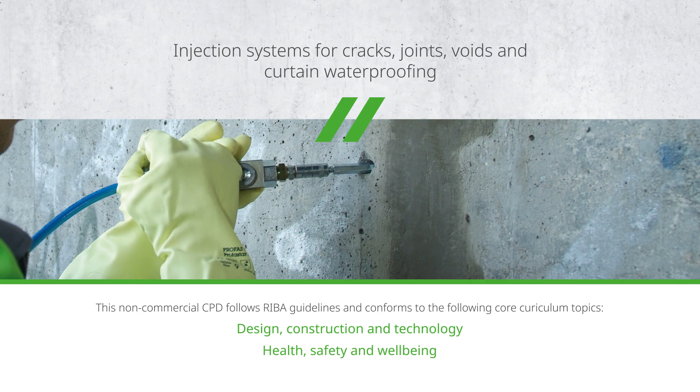Welcome to the Köster Aquatecnic CPD on injectable systems for cracks, joints, voids and curtain waterproofing.

The contents of this training are split into 7 sections: a short introduction to Köster Aquatecnic and myself; what we can do with injection resins; key types of products available, covering polyurethane resins, epoxies, acrylic gels and microgrouts; ancillary products such as injection packers, injection pumps, cleaners and special mortars; health and safety; detailed application guidance; and the main injection techniques, including some interesting case studies.

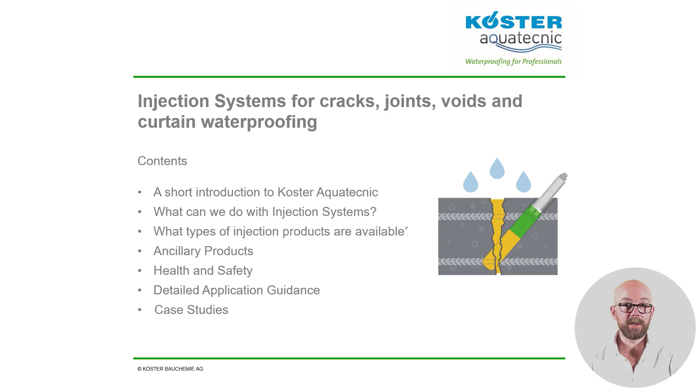Learning objectives: by the end of this CPD, you'll have increased your knowledge on the different uses of injectable products, be able to understand the strengths and weaknesses of the various systems and in what situations they are relevant, and you will have a solid introduction into the injection techniques used and the types of equipment needed.

But firstly, I would like to introduce myself and Köster Aquatecnic. My name is Alex Lynn. I'm the Technical Director for Köster Aquatecnic. I've been with the company for several years and I'm a CSSW qualified surveyor and designer.

Köster Bauchemie is located in Aurich in the northwest of Germany and was founded by Johann Köster in 1982 as a manufacturer of waterproofing systems. Today, Köster Bauchemie is a group of 26 companies with worldwide activities. Köster specialises in the development and production of waterproofing systems and construction chemicals.

Our UK operation was established in 1999 to provide distribution and local technical support for the Köster range. We provide a free, in-depth technical consultancy service, helping you to find the best solution for each individual project. For remedial works, we can help to ensure that a correct diagnosis is made, which is the first step to finding a cost-effective and permanent solution. For new builds, we can provide individual detailed drawings prepared by our CSSW qualified staff to suit even the most complex of structures.

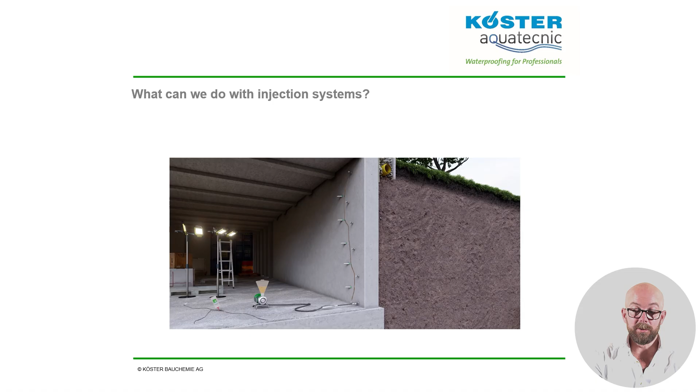First up, injection of leaking cracks or construction joints. This sort of work would normally be carried out with foaming polyurethane resins. Cracks can occur due to shrinkage, movement, or stress. With injection resins, we can stop the leaks and elastically seal the crack pathway.

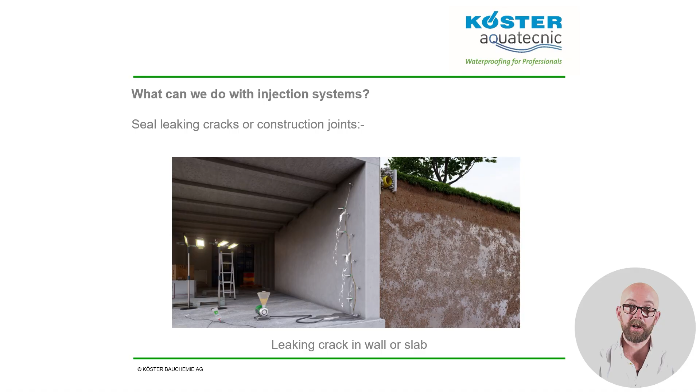Another area that often causes problems is the wall-to-floor junction. It may be that the concrete wasn't properly vibrated, or there was a problem with the water bar, or perhaps the shutter wasn't tight, letting some of the cement paste leak out and creating voids. With injection resins, we can seal this joint either with a borehole injection or by pumping resin into a pre-installed injectable water bar.

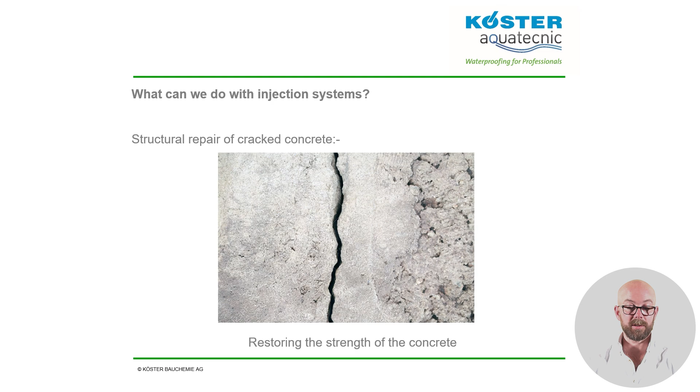Resin injection isn't just about stopping leaks. In some cases, resin injection is used to restore the structural strength of the concrete. For instance, when you have cracks in a load-bearing concrete beam or cable anchor blocks, with the latest generation of epoxy resins, even the smallest cracks can be injected, restoring the original strength of the concrete.

At this point, it is interesting to ask the question: what is a crack? Would anyone like to answer this question? We'll have a think about it. There are many correct answers, but an answer will be provided later on in this presentation.

When movement joints leak, they can be very difficult to repair. However, with a polymer-modified acrylic gel, these joints can be sealed elastically, even when wet.

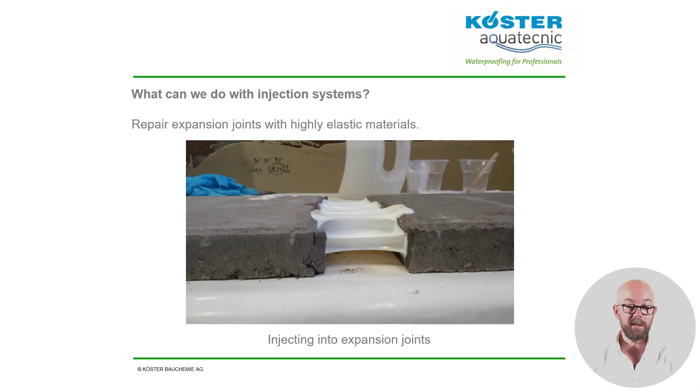It is always preferential to waterproof below-ground structures from the outside, the positive side. However, with existing buildings, it is often impossible to excavate the basement. You could waterproof internally with a cementitious coating or a cavity drainage system, but if it's historic brickwork or stonework, the only option is to waterproof externally, but from the inside. This is called curtain injection and is normally undertaken using acrylic gels.

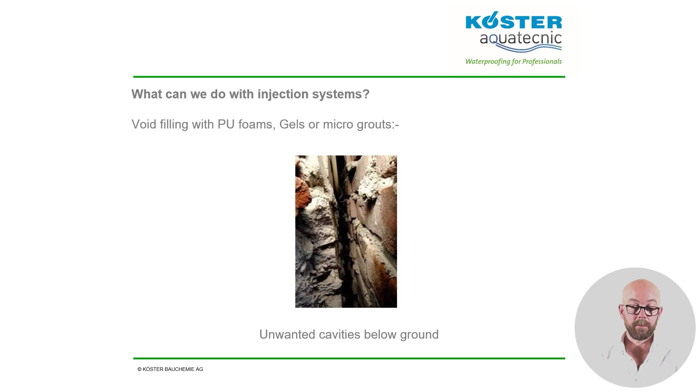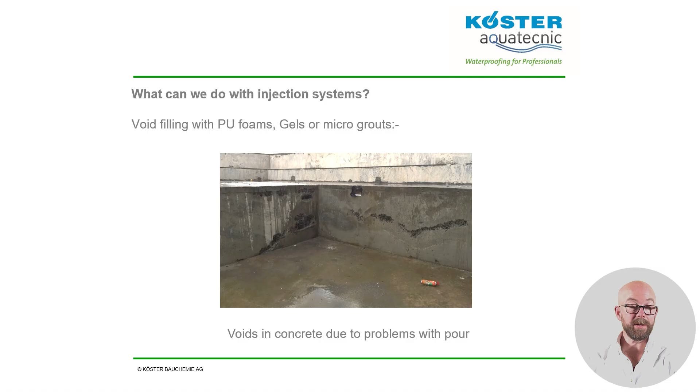Void filling. This is a good solution where a non-maintainable cavity has mistakenly been created below ground. Other voids encountered are those formed during the concrete pour due to lack of vibration, bad rebar placement, or leaking shuttering. For these voids within the structural concrete, a microgrout would normally be used.

So, having looked at what we can do with injection, we can now look at the types of injectable products available. The first category is polyurethane resin.

There are three main types of injectable PU resins: 2-in-1 resins, which foam on contact with water, or without water form an elastic solid body resin; 2-component highly elastic solid body resins; and 1-component fast foaming water stopping resins, either with or without an accelerator. We will look at each of these in a little more detail in the coming slides.

There is another category which we won't be covering, and that is slab jacking resins. This is where they inject a very fast reacting foam with strong expansion beneath a concrete slab to lift or realign it. This is a highly specialist and potentially hazardous activity, which we are not involved in.

All modern PU resins are based on MDI isocyanates and are free from the more harmful TDI isocyanates, which unfortunately can still be found in the UK market. You can normally spot these as they have a skull and crossbones on the label.

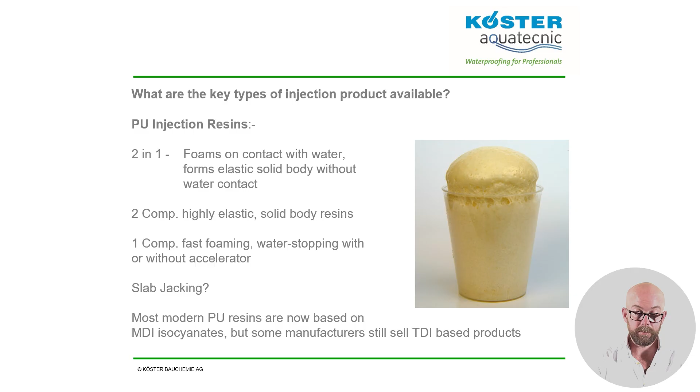2-in-1 resins are very versatile. They are a 2-component polyurethane, but work in a very interesting way. As soon as you mix part A and B together, the reaction has already started. If you just left that mixture on its own, it would cure to form an elastic solid body resin, as shown on the right.

This would be ideal for injecting into dry cracks to achieve a permanently elastic seal. However, if you introduce the freshly mixed material to water or dampness, it will react to make a foaming polyurethane. This one material can be injected into dry, damp, or wet cracks. When you inject into a wet crack, the material reacts to form an expanding foam. This uses up some of the water in the crack and pushes the rest of the water out.

The foam is fully formed in about 6 to 10 minutes. It is then re-injected with the same material after 15 to 20 minutes. The new injection will push back the soft foam and fill the crack with a solid body of resin. There is no water contact during the second process, therefore the product does not foam. The elastic solid body resin has much greater elasticity than the foam and will create a permanent seal.

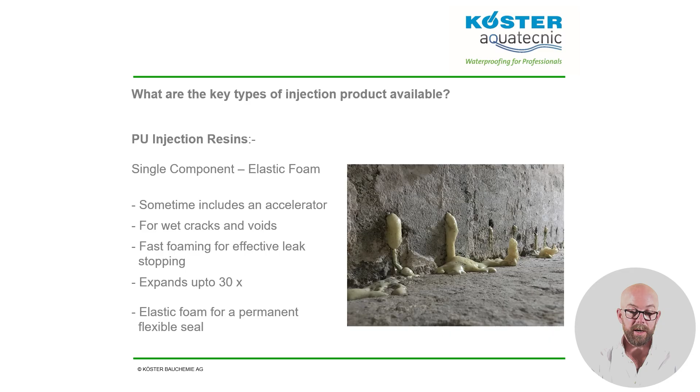It is very important when selecting a single component resin that you choose one that produces an elastic foam. There are some rigid single component foams in the market. These can stop water leaks, but will shrink back over time or crack if there is any movement. An elastic foam will grip firmly to the internal surfaces of the crack and will allow for continued movement.

Next, we're going to focus on acrylic gels. But firstly, what is a gel? Acrylic gels are different technology to the polyurethanes. They are made of methacrylates. They behave in a different way to polyurethanes and present several advantages.

Acrylics do not react with water, but form chains of polymers that are connected so strongly that they bind water inside their structure. Since acrylic gels contain water, they are in a state between solid and liquid, giving it a viscoelastic consistency. They are highly elastic, but if physically split, they tear in a similar way to edible jelly. The connections between the polymers are so strong that they can resist a water pressure of over 7 bar.

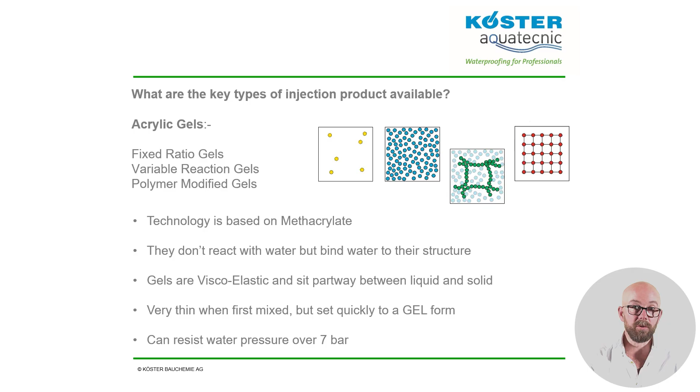Most acrylic gels fit into one of 3 categories: fixed ratio gels, variable reaction gels, and polymer modified gels. We will start with the fixed ratio gels, as these are the default product for curtain injection. They are supplied in 3 parts: A1, A2, and a B, which is a salt.

You pour the A2 into the A1 drum and mix by simply rocking from side to side. The part B is emptied into the second drum, which is then filled with clean water to the same volume as the first drum. The pre-mixed A and B components are then pumped separately through an acrylic gel pump.

At a ratio of 1:1, the materials only come together at the mix head just before entering the injection packer. There is a third hose in the pump, which is for water and is used for flushing and cleaning the mix head. The gel can also be stirred by hand and poured, but you should only mix what can be used within a few minutes.

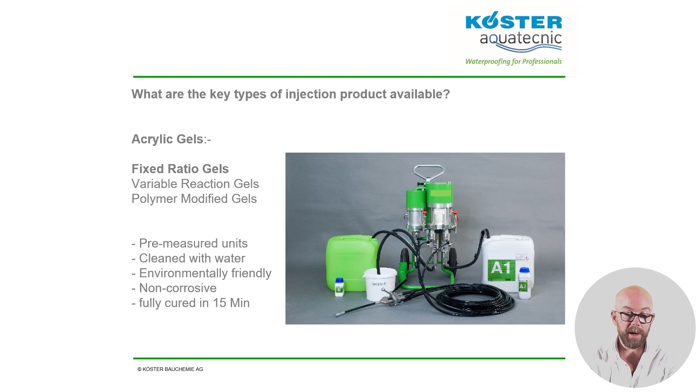This type of gel is environmentally friendly and will not pollute the watercourse. With the latest gels of this type, all the salt is used up in the reaction so they don't cause corrosion to any metals within the structure.

When first mixed, the material has an extremely low viscosity of 4 millipascals. As a comparison, water would be 1, sunflower oil is approximately 48, and runny honey would be at least 2000. So the gel seems pretty like water.

After 3 to 4 minutes, the material will enter the cloud phase, where the material starts to show a purple tinge, then slowly turns white. By 6 to 8 minutes, the network phase, the material begins to rapidly start to thicken. After about 15 minutes, the reaction is complete.

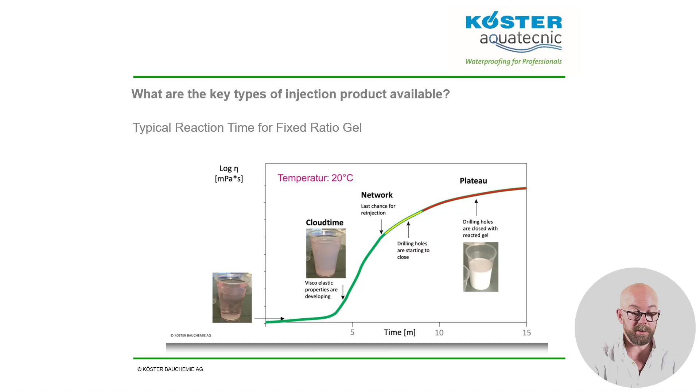The great thing about fixed ratio gels is that there's no weighing or measuring to do on site. Everything is set to the perfect ratio for most applications.

Here we can see a demonstration of an acrylic gel in action. In the small container we have sand. In the right-hand beaker we have the part A, which consists of the part A1 and A2. And in the other beaker we have the part B, which consists of the B1, which is a special salt, mixed with water. You can see that the two parts take up the same volume.

After mixing the part A and B together, some of the mixture is poured into the sand and some is left in the beaker. Note that the material isn't stirred into the sand but penetrates easily, just as water would.

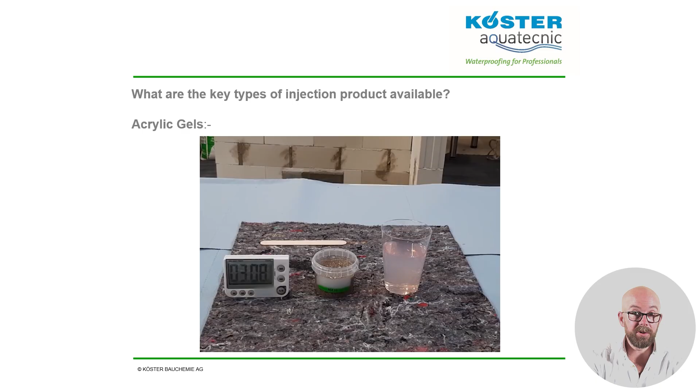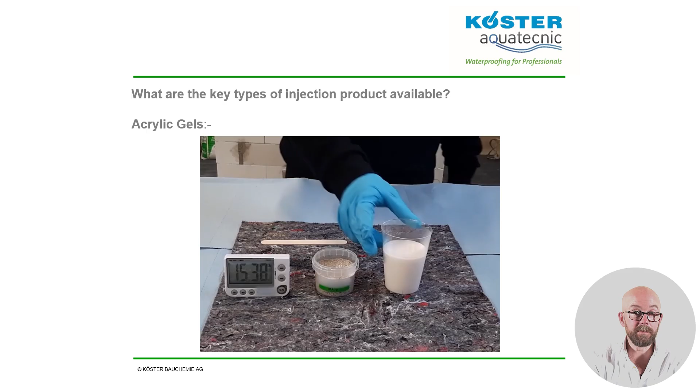After about 3 minutes, the material starts to go cloudy, and in about 6 to 7 minutes, it forms a gel, which gets gradually harder over the next few minutes until the reaction is complete in about 15 minutes. At this time, the gel is very solid and has a firm, rubbery texture.

The sand has completely consolidated by the gel and is now a firm, waterproof mass.

The variable reaction gel has most of the same properties as the fixed ratio gel, but has a higher degree of versatility. Whereas the initial gel time for the fixed ratio gels is about 8 minutes, the variable reaction version can be customized to gel when you need it to.

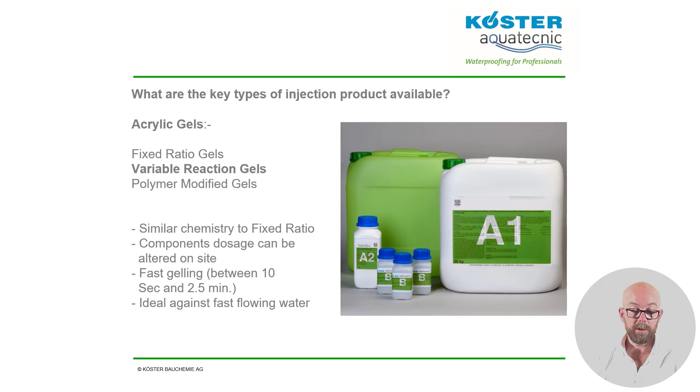The gel time can be set to anywhere between about 10 seconds and 2.5 minutes. The time is altered by changing the dosing of the B component between 50 grams and 1 kilogram. The material is mainly used for situations where you have very heavy flows of water.

A polymer modified gel is the same as a variable reaction gel, but uses a special polymer combined with salt for part B, instead of water and salt.

This has 3 beneficial effects: it makes the reaction time faster, it improves the flank adhesion in joints, and it increases the resistance of the gel to drying out when there is no contact with ground moisture.

This gel is mainly used for refurbishment of failed expansion joints. It can be used with minimal surface preparation on wet joints and has incredible elasticity and adhesion.

Now we come to epoxies for structural repair. It is always important to choose one with low viscosity, particularly when injecting fine cracks and networking of cracks.

These products are used for structural repair by either pressure injection, pouring, or vacuum injection. The best products have a very low viscosity of 175 millipascals. This is less than half the viscosity of some of the older style epoxies used for injection and will be described as a thin liquid.

The low viscosity means it can be used in even the smallest of cracks at very low injection pressure and can even be gravity fed into repaired floor cracks. This type of low viscosity epoxy also has very good adhesion even to damp concrete and cures to a strength of 80 newtons per millimetre squared, so can fully restore the structural integrity of the concrete.

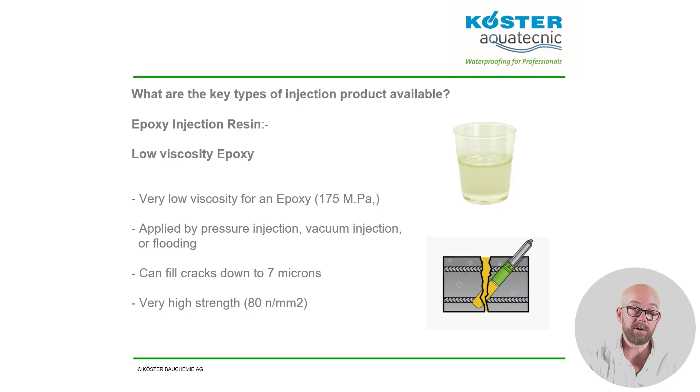Now for something completely different. Microgrouts aren't injection resins, but cementitious injection materials. They are used for filling large voids in concrete and for restoring the structural strength. They are thicker than epoxy resins, but still very thin for a mortar, with very good flowability.

The maximum particle size is 0.1 millimeters. In theory, you could fill cracks down to 0.2 millimeters. However, when dealing with any cracks under 2 millimeters, we would always recommend an epoxy resin. You can do crack injection with a microgrout, but there are better products available.

Where microgrouts really come into their own is for filling large voids within concrete. With microgrouts, we can fill voids with a product of a similar strength and characteristics of the concrete surrounding it. The material is supplied in powder form and is simply mixed with water. It's pumped using a peristaltic pump or any other grouting pump. The final compressive strength after 28 days is 60 newtons per millimetre squared.

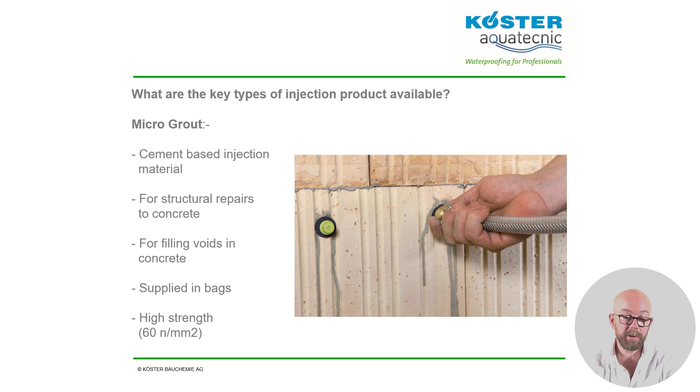That's all the injectable products. But what ancillary products do we need to facilitate the injection? Firstly, injection packers or lances. These are the mouthpieces through which the injection product is delivered into the crack or void.

They come in all different shapes and sizes. Impact packers are generally made of plastic with fins or lamellas along their sides. The packer is force-fitted into the borehole with a hammer or drive-in tool. As it goes in, the lamellas are forced out of shape and make a positive seal against the walls of the borehole, locking the packer into position.

Some drive-in packers have a non-return valve, some have no valve at all, and some have an optional valve piece that can be pushed on if required. Impact packers are normally left in the wall. After injection, you can cut off the protruding piece and drive the rest deeper into the wall. Some are designed to snap off at a particular point within the hole if hit with a hammer, making the removal process very quick and easy.

The most common type of injection packer is the expanding packer. These are made from metal, they have a screw thread, and when you tighten the shaft, the rubber piece in the hole becomes compressed lengthways, forcing it to expand outwards, firmly gripping the walls of the borehole. These packers either have a grease nipple or conehead fitting to connect to the injection hose and pump. These connection pieces contain a ball valve, which ensures the injected material won't leak back out when you stop injecting.

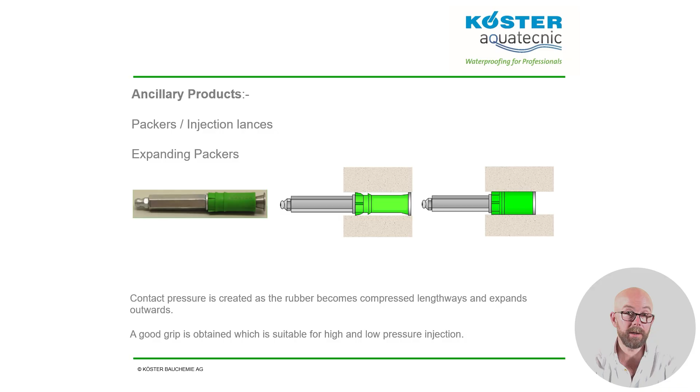The one-day packer is designed for small injection jobs, where the contractor wants to get in and out in one day. It is similar in principle to the standard packers, but has an additional non-return valve at the end that goes into the wall, as well as a locking ring halfway up the shaft.

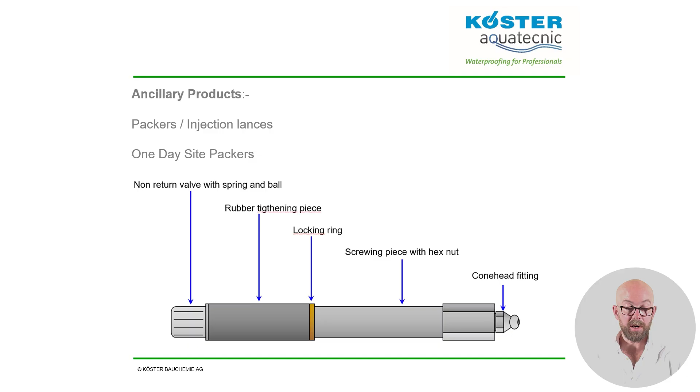When you are finished injecting, you can unscrew the shaft, leaving the rubber part tightly in the borehole. The injection resin can't flow back out due to the extra valve, so you can fill the mouth of the borehole straight away. With a normal packer, you would have to wait for the injection material to cure before unscrewing it.

There are special gel packers specifically designed for curtain injection. The packer comes in 3 pieces: a connection piece, a shaft which is cut to suit the wall thickness, and a special mouthpiece to push the material out sideways.

During the injection process, we often use fast-setting mortars and water stops. The most common use is for sealing the front of the crack prior to injecting. In the case of a dry or damp crack, this can be done with a fast-setting, high-strength mortar with a set time of about 5 minutes.

Why do we seal the front of the crack if it's dry though? To keep the injection resin in the wall during injection. Because when you start injecting, the resin's under pressure. To equalise that pressure, the resin looks for the fastest and easiest route out. This will often be straight out the front of the crack and down the surface of the wall. But we want the resin to move slowly along the crack pathway and seal the whole depth of that crack. Therefore, we use the mortar to seal off this escape route.

The same mortar is then also used after removal of the injection packers to seal up those boreholes.

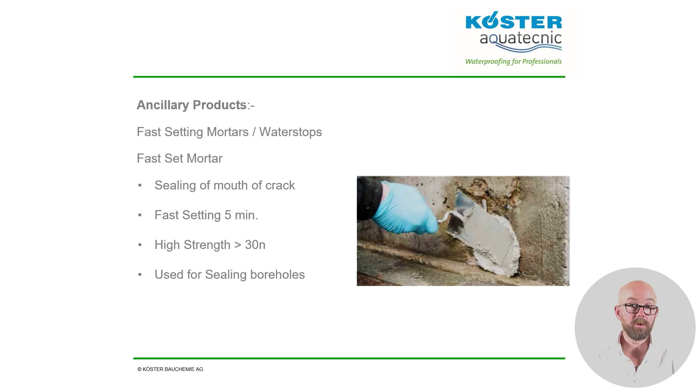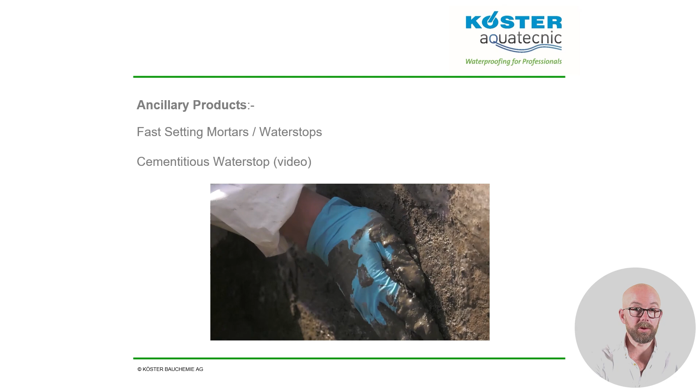In the case of flowing water, we may need to use a cementitious water stop to temporarily stop the leakage, slow the leakage, or push the leakage to a particular point. Water stops set in about 2 minutes and slightly expand, creating a very tight seal.

Different injection products require different types of injection pump. These vary from a simple hand pump, basically a grease gun, to a pneumatic gel pump with 3 pistons. The choice comes down to what you are injecting and how large the project is.

The last of our ancillary products is cleaner. Proper cleaning is of the utmost importance. If the injection material is allowed to set in the pump, you will incur expensive repair charges. PU resins are always cleaned with a PUR cleaner. This is solvent-free but very good at shifting fresh resin.

For the gel pump, it's a little easier as the A and B components are not mixed together until they reach the mix head. The material is a lot thinner and less sticky than polyurethane resins, so for gel pumps we can just clean with water. For microgrouts, you can again use water to flush out the pumps. You should also use foam cleaning balls to help clean any mortar residue from the delivery hose.

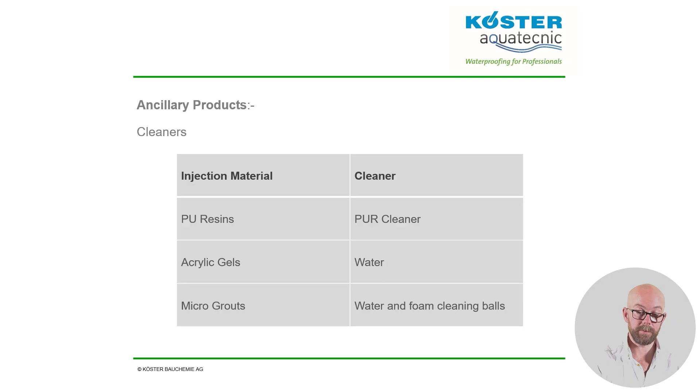The health and safety and well-being of the people who work with waterproofing materials must be considered, and stringent policies put into place. All UK construction sites require operatives to wear basic PPE, but when working with specialist materials, there may be additional requirements such as ear defenders, dust masks or face shields, gloves, overalls, and forced ventilation.

None of the Köster injection materials contain solvents, but eye protection and gloves should always be worn. Cured material, particularly epoxy or PU resins, is very difficult to remove from your skin. For some injection materials, forced ventilation or even breathing apparatus could be required if in confined areas.

We also have to be careful working with drills, particularly in areas where the structure is compromised. The main contractor should prepare a COSHH risk assessment for every site where crack injection works are being carried out. The material and application risks are made clear on the manufacturer's MSDS sheets.

We will now look a little more into the specification and application of injection products. Before specifying a particular system, we try to understand the cause. By understanding the cause of a crack, we better know how to fix it.

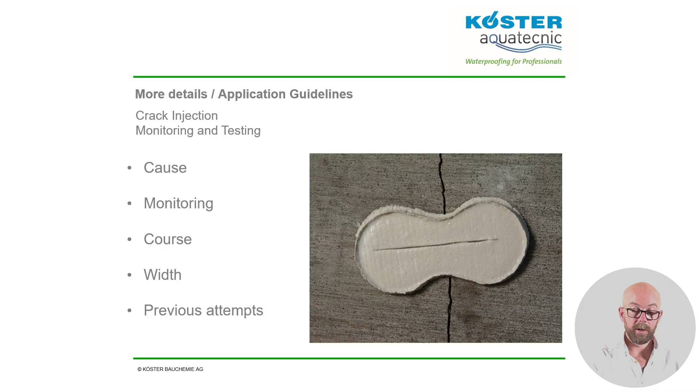Monitoring. If the crack is still moving, how do we know? In some cases, it is agreed to monitor a crack over a period of time. A monitoring gauge is used. The simplest form is a gypsum mark, as shown in the picture. This will show movement by cracking across the narrow centre section.

A more complex type of gauge is made up of two parts which are firmly bonded on each side of the crack. A scale will show whether the crack is moving, and readings can be taken at regular intervals.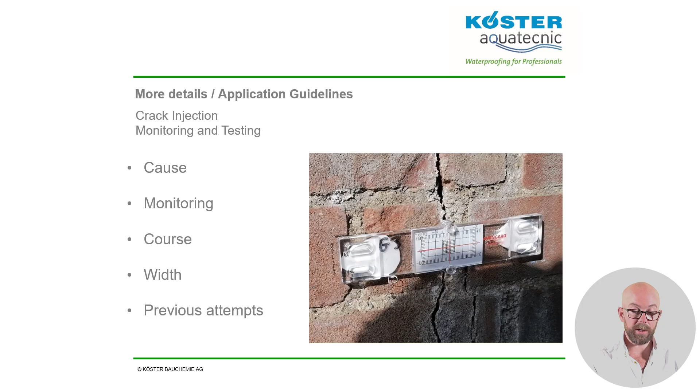The course: if we can learn the course of the crack, we often see that it interacts with other elements such as day joints or expansion joints. This may be the way in which water is being fed into that defect. Understanding the interaction of the crack within the structure can help us select the best location for the injection packers.

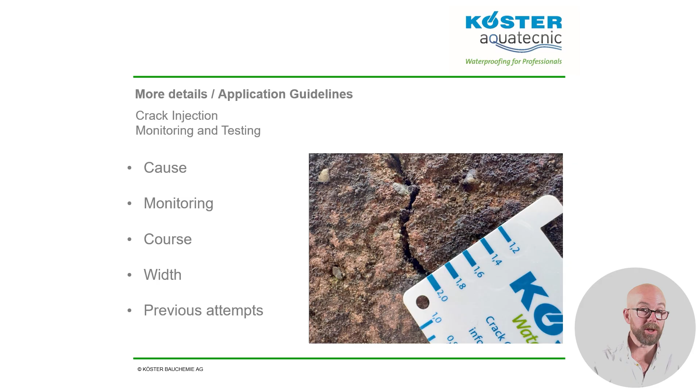The width of the crack. This will affect the amount of injection material used, the type of injection material, and the spacing between packers.

Previous attempts. If someone has made previous attempts to seal a leaking crack, the connectivity between the boreholes can be affected. The crack is partially filled with old resin, which may have shrunk back slightly. It is therefore very difficult to find a way of hitting all the weak spots. It may be that you need to drill additional boreholes and allow for repeat visits to ensure sealing of all the leaking areas.

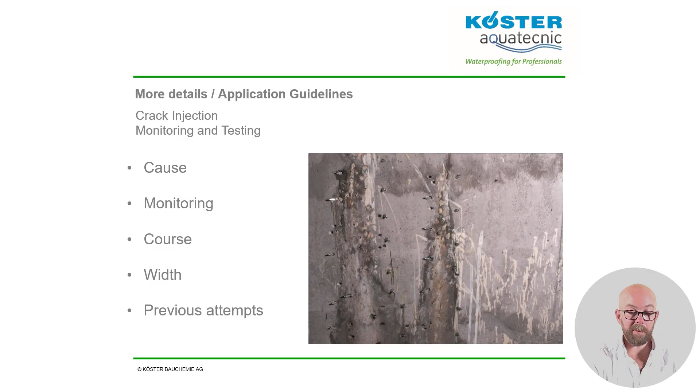This is a crack survey that was carried out on a wind turbine base. Producing such a survey takes a lot of time and effort, but is very useful when planning the job, during the application, or even in the future, so we can tell if any new cracks have developed.

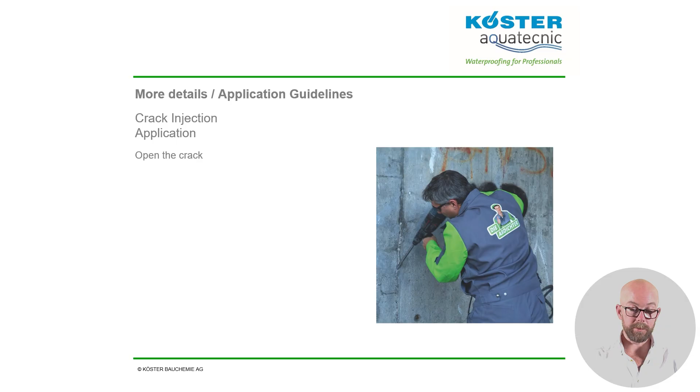Now, we will look at a typical resin injection project using a polyurethane 2-in-1 resin into a vertical crack. Firstly, we should open up the face of the crack with a grinding disc or a breaker, removing all loose material. The borehole positions are marked on either side of the crack.

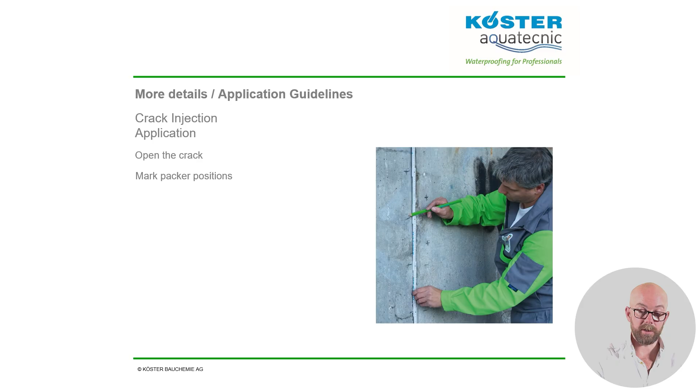The narrower the crack, the closer together the packers need to be. Typically, this would be between 100 and 150 millimeters on alternate sides of the crack. Drill the boreholes, in this case 14 millimeter diameter, intersecting the crack about halfway through the wall thickness.

Seal the face of the crack with a fast-setting mortar, or in the case of heavier water flows, a cementitious water stop. This helps to keep the resin within the crack matrix during the injection process.

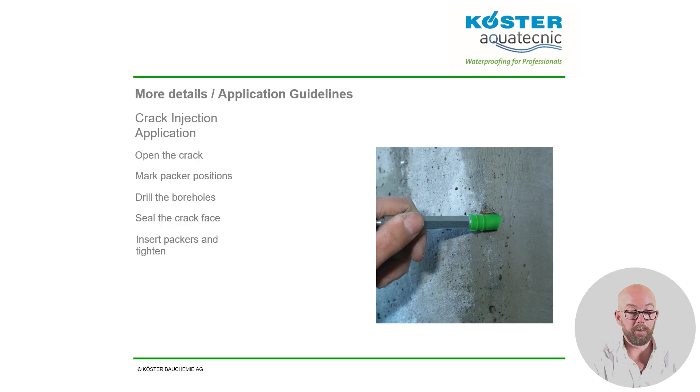Next, insert the packers into the borehole and tighten. Each packer is injected in turn, working from the bottom upwards. If you're injecting with a 2-in-1 resin, then each packer is re-injected after 15 minutes.

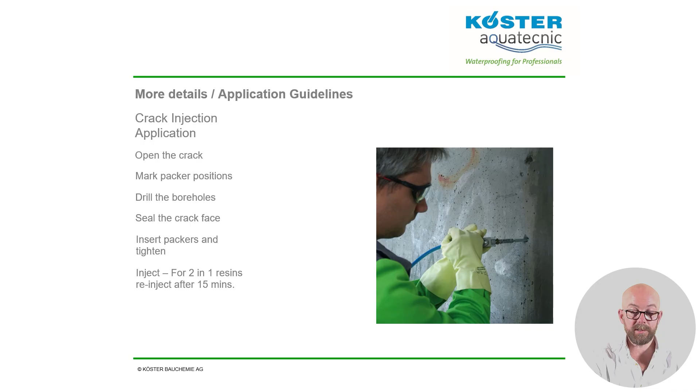During the second injection, there is no water contact and the two-component polyurethane will cure to form an elastic solid body resin. It is normal to loosen or remove the next packer in the chain during injection.

When you see the resin arriving at the open borehole, you will know that the section of the crack is fully filled. The packer is then replaced or retightened, and you continue injecting, moving along the crack until completely filled.

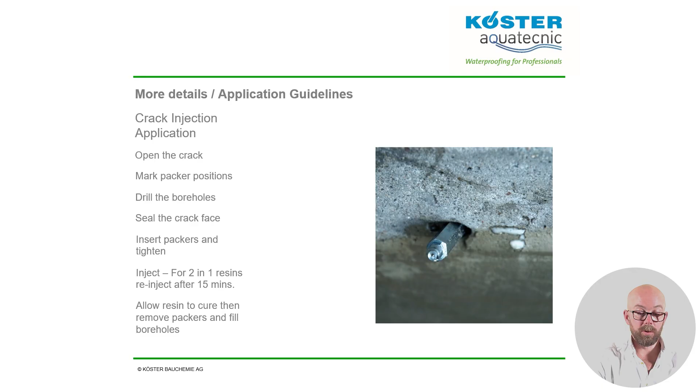After the second injection, allow the resin to fully cure. With most resins, this will take 24 hours. The packers can then be removed by unscrewing and the boreholes filled with the fast-setting water stop. If using one-day site packers, these can be removed immediately after the second injection.

The boreholes continue a little beyond the crack. This helps to prevent drilling debris from clogging the pathway of the injection resin. The packers alternate from one side of the crack to the other.

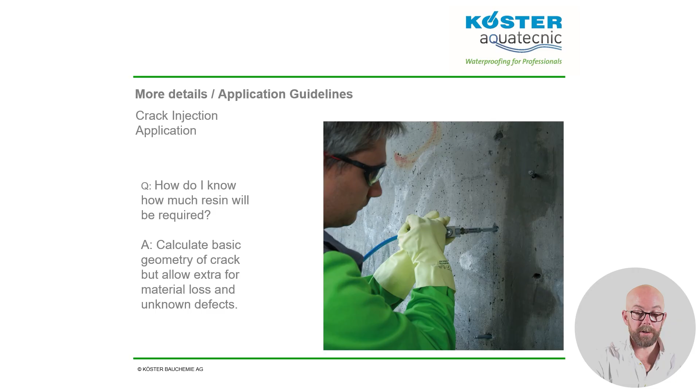How do we know how much resin to inject? We can estimate consumption by looking at the theoretical volume of the main crack itself. It's unknown how much material will be lost at the back of the wall or into defects branching off it, though. This is where the experience of the supplier or specialist contractor is so important.

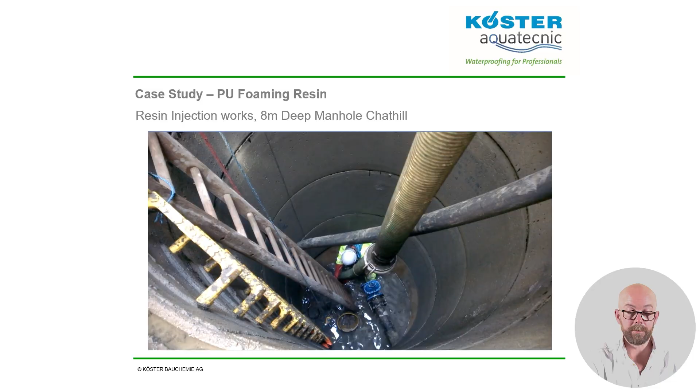We will now look at a case study involving injection of a single component elastic foaming polyurethane. This is an 8 metre deep manhole on a new sewerage treatment works in Northumberland. Several attempts have been made by others at sealing the deep manhole, but they had all failed. The water ingress was quite extreme.

Following a site visit and detailed investigation, a proposal was made and the client agreed to give this a go. If it failed, they were going to have to excavate the entire manhole and start again.

In all complex injection jobs, the first thing to do is understand the structure. The original build of the manhole was fairly conventional. Firstly, a deep hole was excavated with a cast concrete base at the bottom.

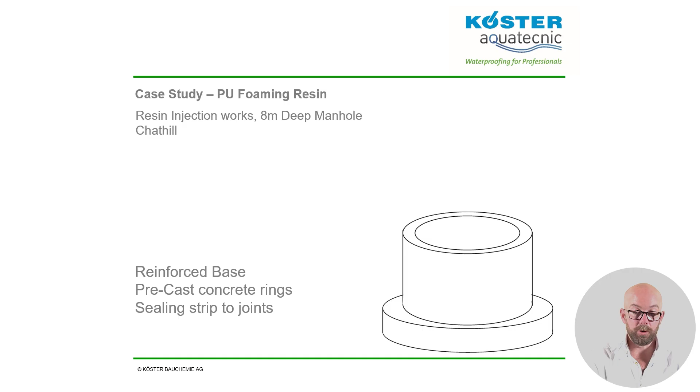Precast manhole rings were installed with a bituminous sealing strip between all the joints. We don't know why this structure originally failed, but it's possible that the sealing strip was missed from the lowest joint or was improperly applied.

To try and stop the water ingress, the contractor had installed a rigid plastic liner. This created an additional reservoir of water between the liner and the manhole ring, and it still leaked.

They then installed an inner wall of concrete rings. This created yet another void for the water to flow into, and guess what happened? Yes, it still leaked. When the water was pumped out, there was a heavy flow of water entering at the wall-to-floor junction, creating a whirlpool effect.

In this situation, the leaks had to be confined to a smaller area. This was done by using a water stop to gradually form a waterproof fillet around that bottom junction. Using this technique, the leakage was confined to 4 equally spaced outlet points.

Boreholes were drilled and injection packers inserted into these points, again sealed around with a cementitious water stop. Hoses were connected to the packers, with the other ends placed into a large bulk bin together with a water pump. Now all the leakage was coming through the 4 hoses into the bin before being pumped away.

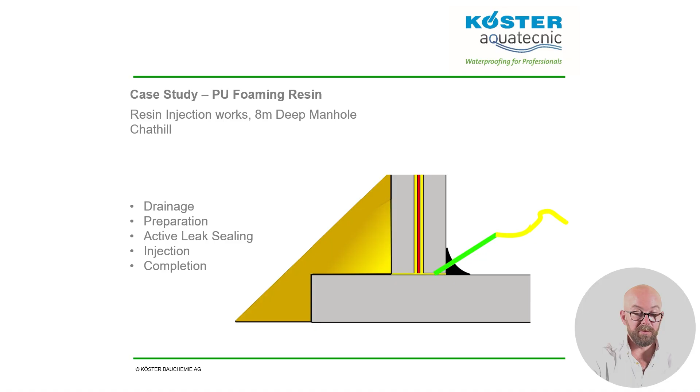After removal of the packers, the boreholes were filled with mortar and everything left for a week to check for further ingress. After a week, there were no leaks, so a new floor at the bottom of the manhole was cast with a high-strength, waterproof and chemically resistant sewer and shaft mortar.

The second Severn crossing is a 5,128 metre long bridge between England and Wales. The centre section is a cable-stayed bridge with 2 approach viaducts. The bridge was completed in 1996 and is now the main entry point into Wales.

During routine maintenance, a large number of small cracks were found in these blocks. After various tests, a full report was submitted to the Second Severn Crossing Authority. It was agreed that structural repair was necessary, and it was further decided that vacuum injection was the best way to proceed.

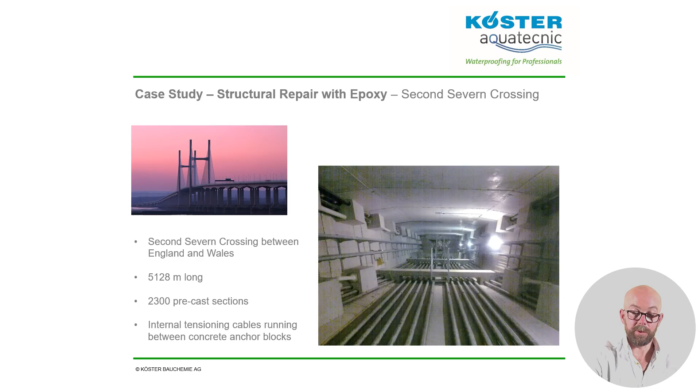Smoke testing had shown that the faults were interconnected, making a complex matrix of cracks in each block. In some areas, the cracks had created islands of concrete that were in danger of falling off if drilling or high-pressure injection was used.

The plates were fixed in place with a two-part adhesive, which was then also used to cover all visible cracks on the surface. The vacuum pump gently removes air and residual moisture from the crack network, creating a low-pressure area which is then ready to receive the injection resin.

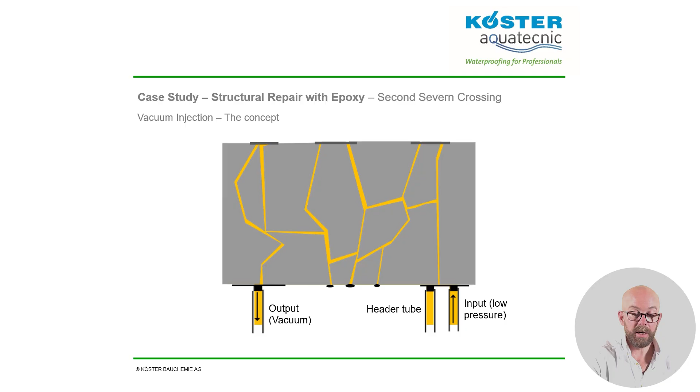At this point, the inlet valve was opened and the resin released. A slight positive pressure was also applied on the injection side as this sped up the process. The resin flowed very easily into even the smallest of cracks and filled the header tube, which was fixed in an upright position.

When the injection was finished, the vacuum side and the injection side were turned off. The full header tube was left open to provide a reservoir, replacing any material lost through slight leakage from the cracks. Once the resin had set, the header tube was then also removed.

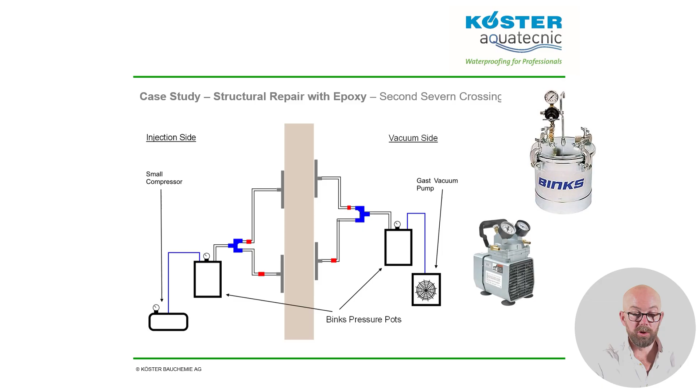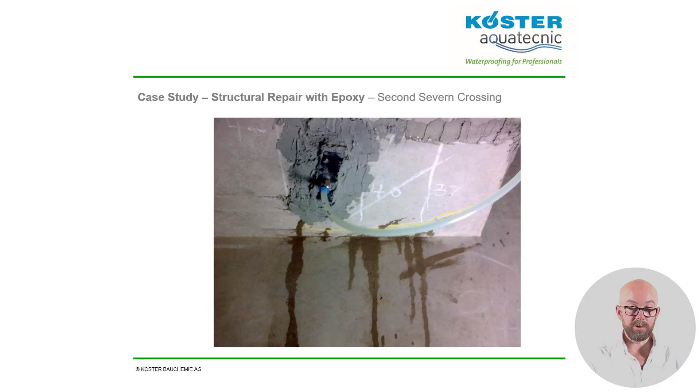Here is an area under injection. You can see some small amounts of resin running down, mainly from the intersection between the anchor block and the concrete wall. We can see that the resin has filled tiny cracks that were not even visible prior to the injection starting. The trial went extremely well, and a core sample was taken from the anchor block to confirm that the cracks were fully filled and that the adhesion to the concrete was good.

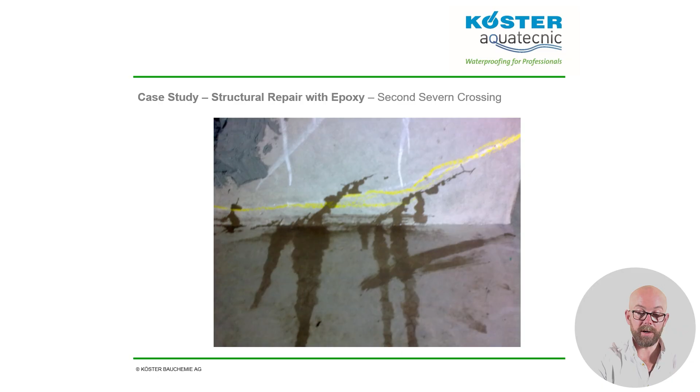Analysis of the core samples under electron microscope revealed that all cracks that could be found in the specimen were fully filled with resin. The smallest crack that they could find was 17 microns - that's 17 thousandths of a millimetre. This could be achieved with a very thin epoxy and by vacuum injection.

The main contractor in the project has now changed, but the work is continuing using the same resin and procedure.

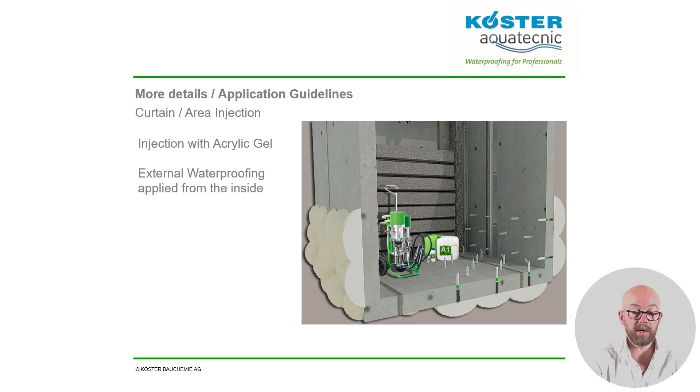We will now have a look in more detail at curtain injection. With curtain injection, we are aiming to install a complete coverage of the injected material across the earth retaining side of the structure. We install packers in a grid pattern across the surface. Curtain injection can be considered as an external waterproofing installed from the inside.

A typical injection pattern is shown on the left-hand side. We call this 400mm centres - basically a 400 by 400mm square with an additional packer placed in the centre. The dimension D is the maximum distance between one packer and its nearest neighbour. Distance D works out at just over 280mm.

The packers are injected in rotation, normally three times for each packer. After the first pass, the easiest pathways are sealed. During the second and third passes, the gel is forced into even the finest capillaries.

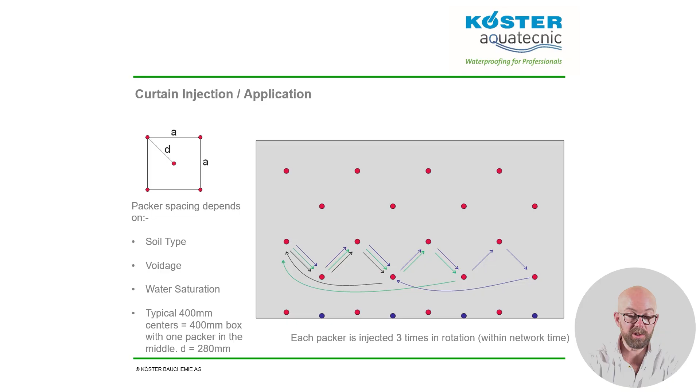The gel time is very important. With a longer gel time, you can get deeper penetration into finer pores. With a shorter gel time, you can seal heavier leakages very quickly.

When you increase the temperature, you decrease the time it takes for the gel to react. Adding more salt has the same effect. The part B of the acrylic gels is a form of salt, so for the variable reaction gels, we can increase or decrease the amount of part B to speed up or slow down the reaction time.

For a classic curtain injection, we completely drill through the wall and then use a gel packer which pushes the gel out sideways into the soil at the back. The gel tends to form a dome shape. As we continue the injection process, the domes of gel overlap to form a continuous curtain of waterproof material at the back of the wall, eventually covering the entire area.

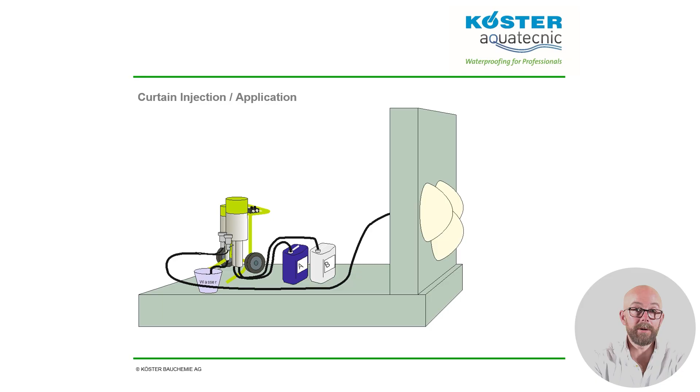An area injection is a slight variation on a curtain injection. We are sealing pathways within the wall rather than creating a barrier behind it. This technique would typically be used in thick masonry walls where there are a lot of voids between the bricks. In this situation, we don't drill all the way through the wall, but stop about 50mm from the back. The boreholes are normally drilled into the mortar joints, and we insert short packers at the wall face.

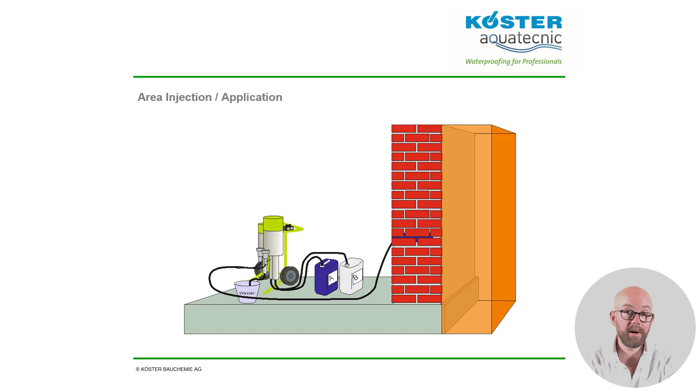By injecting the packers, we fill the boreholes and gel is forced out sideways into the defects. Therefore, the structure is infilled with the waterproof and elastic gel. As the wall is not sealed at the back, a certain amount of gel will inevitably leak out, sealing all the previous points of water ingress.

If doing a full curtain injection on a brick wall, a combined injection is typically carried out. Drill the boreholes all the way through the wall, but insert small packers at the face of the wall. In this way, the gel is deposited at the back of the wall as curtain injection, but at the same time fills any voids within the wall with gel. One advantage is that small boreholes of down to 8mm, depending on the packer, as opposed to 18mm for the normal gel packers, means curtain injection can normally be carried out without damaging brickwork.

In 2016, there was a trial carried out by London Underground to test the effectiveness of a gel injection system for sealing brickwork tunnels. The trial area was located close to Farringdon Station on the Metropolitan line.

The construction of the tunnel included multiple layers of brickwork with an assumed pitch-based waterproofing layer applied externally. Throughout this section of tunnel, there was evidence of water dripping through the brickwork with stalactites and heavy salt and soot contamination.

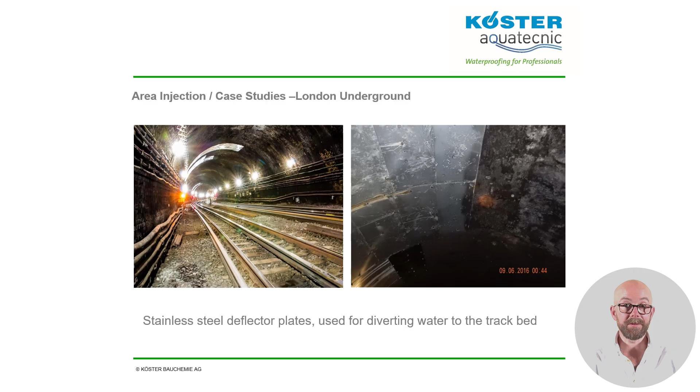In the images in front of you, you can see large steel deflector plates which had been mechanically fixed to the brickwork by London Underground. They are used as a temporary measure to divert water sideways, down the tunnel wall and onto the track bed.

The brief was to provide an elastic, permanent repair with no detrimental effect to the structure or the trains passing through. Acrylic gel was used in combination with a cementitious-based water stop.

A scaffold was erected to ensure a safe working platform. The work was scheduled over 2 consecutive night shifts. Each night, a lot of time was taken up with moving all the equipment from the platform to the trial location, setting up and then taking it back down again.

There was about 2 hours each night to carry out the surface preparation and the injection works. Work started by removing one of the large metal sheets measuring 1 metre by 2 metres from the crest of the tunnel to allow access to the test area.

A closer inspection of the surface revealed a thick crust of salt and soot contamination. This layer was removed mechanically as thoroughly as possible, whilst ensuring the brickwork was not disturbed.

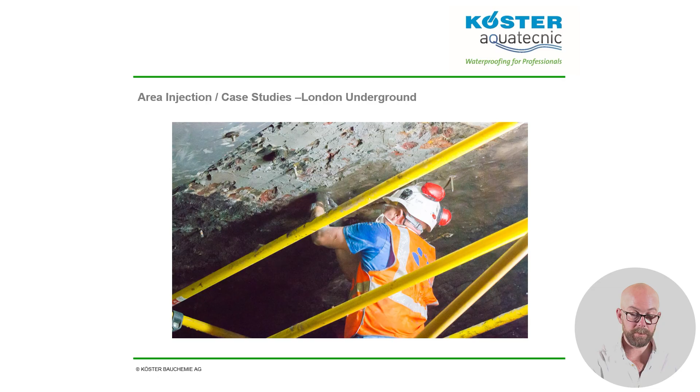The worst leakage points were surface sealed using water stop before drilling boreholes and inserting 85mm packers. The injection ports were placed at 400mm centres in a grid pattern, with a single packer positioned in the centre as we detailed previously.

10mm boreholes were drilled to a predetermined depth so as not to penetrate the original pitch-based waterproofing assumed to be on the earth-retained side of the tunnel.

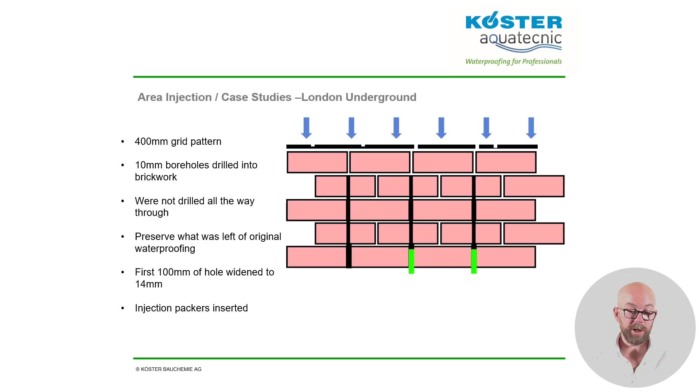The first 100mm of the boreholes was then re-drilled with a 14mm drill to widen out the hole to take a larger 14mm injection packer. The packer was inserted and tightened into place.

The gel material was injected using a dedicated acrylic gel pump. These pumps deliver the part A and part B in a ratio of 1:1 to the mix head.

The packers were then re-injected one at a time in the grid pattern. Each packer was injected 3 times, but by the third pass, very little gel was entering the borehole and the dripping water had stopped. After 48 hours, the trial area had dried up completely, whereas the surrounding brickwork was still heavily leaking.

Continuing with acrylic gels, we now turn our attention to expansion joints.

To have a well-functioning expansion joint, you need a highly flexible and robust joint sealant. You also need to achieve a very good flank adhesion. This is a problem when repairing leaky joints.

All expansion joint sealants require a good level of surface preparation. They should only be applied to a clean and dry surface. If you have a leaking expansion joint, then it's impossible to achieve this without first undertaking remedial measures.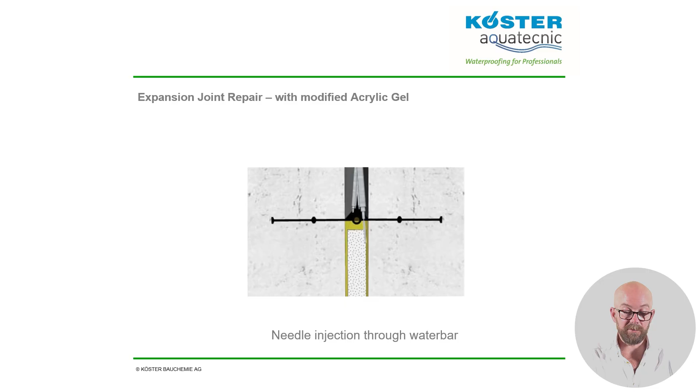These pictures are from a project where the technique was used. On the left, you are looking down into the joint after gel injection. In the centre of the joint is the water bar, and the injection was through it using needle injection. You can see the injected gel working its way around the water bar and showing at the side - clearly one of the points where the joint was leaking.

On the right, we can see the same joint photographed with a thermal imaging camera. As the gel reacts, it becomes quite warm, so by using thermal imaging you can check the spread of the gel within the joint.

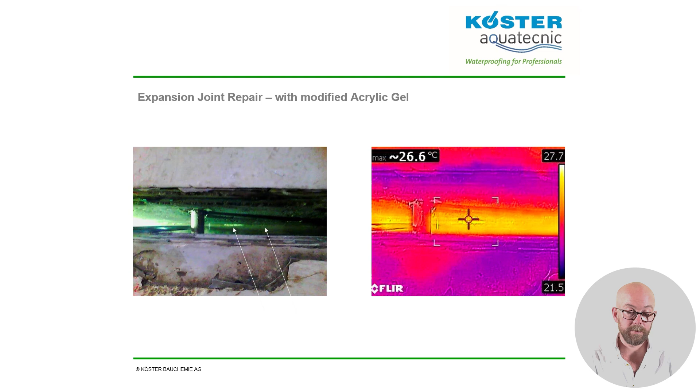This is for the installation of a polysulfide joint sealant. This is an important point: although the modified gel has amazing flank adhesion and elasticity, the one drawback for all gels is that they can dry out if they no longer have water contact and are left open during warm conditions. Therefore, in most conditions, the gel is used within the joint, but with a different choice of sealant for the exposed surface. In this way, the gel achieves a full elastic seal within the joint, and a traditional joint sealant provides a hard-wearing surface treatment.

Here we have a short video clip of the modified gel in action. You can see the outstanding elongation and flank adhesion, and a really good elastic recovery.

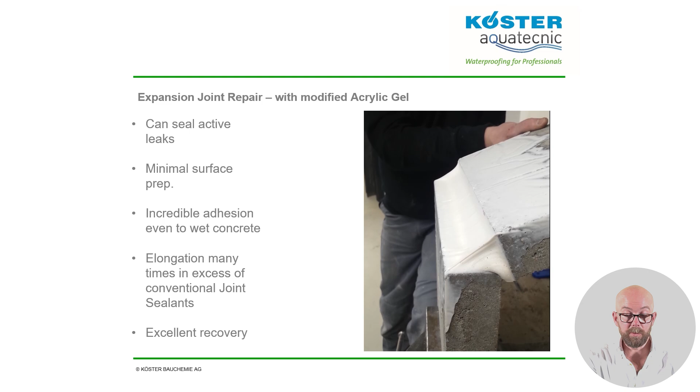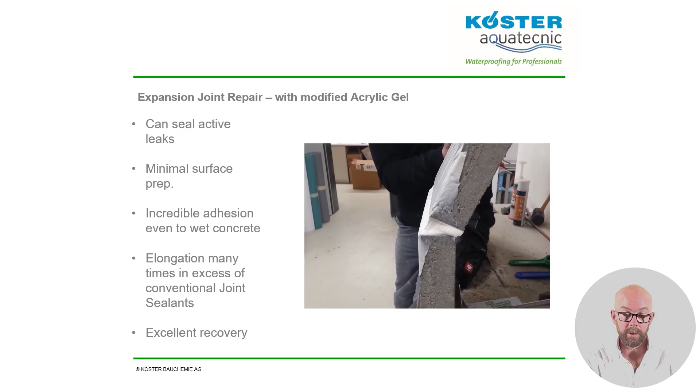The modified gel technique is increasingly used in new build as well as joint refurbishment. Imagine a situation where an expansion joint is to be covered, for instance under insulation or a floating screed, or in a podium deck that is going to be landscaped over. If you rely on a traditional joint sealant, you know that at some point in the future that joint will fail, and the cost of getting to that joint again to make a repair is massive.

However, if you fill the main body of that joint with gel before sealing the top surface, you have a system that will last for the design life of the structure.

You can also fill voids with acrylic gels. In this project for Network Rail, high voltage cable ducts were leaking. The client was worried about the insulation properties of a PU foam, possibly causing the cables to overheat, so a gel was chosen instead. The reaction time was designed so that the entire length of each duct could be injected within the gel time of that material.

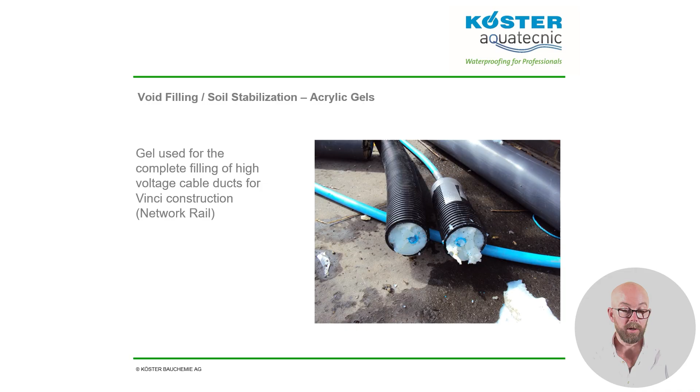In other situations, gel can be poured directly into a cavity. Here we can see the setup with a pipe going from a hopper into a hole where a brick has been removed. The mixed gel is then poured in through a funnel.

We can save on material and provide more stability by injecting or pouring the gel into a void that is already pre-filled with sand. The gel is so thin that it can easily fill the gaps between the grains of sand, providing a cost-effective and durable waterproofing within the void.

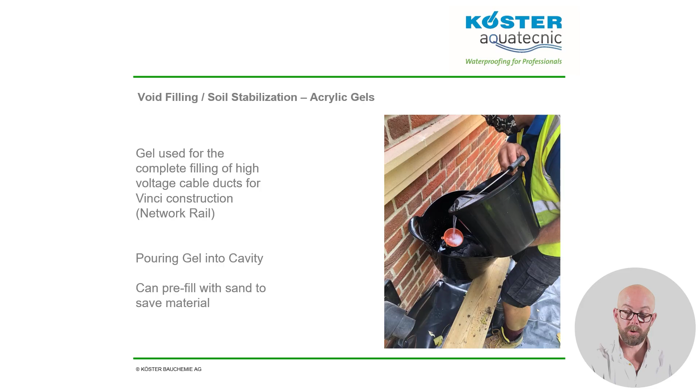For soil stabilisation, acrylic gels are ideal. They fill between the smallest soil particles and bind everything together, providing a waterproof and stable ground mass. The acrylic gels are environmentally friendly and have no adverse effect on groundwater or local watercourses.

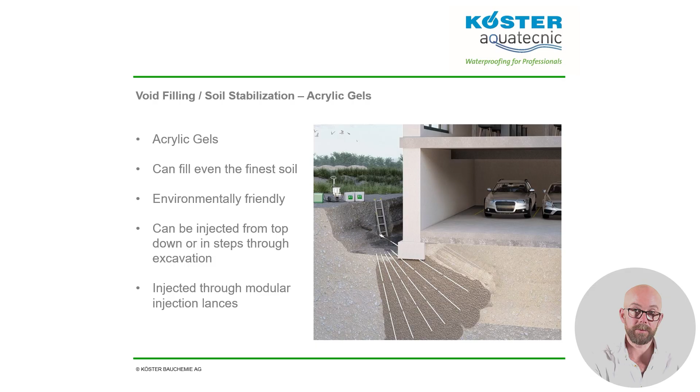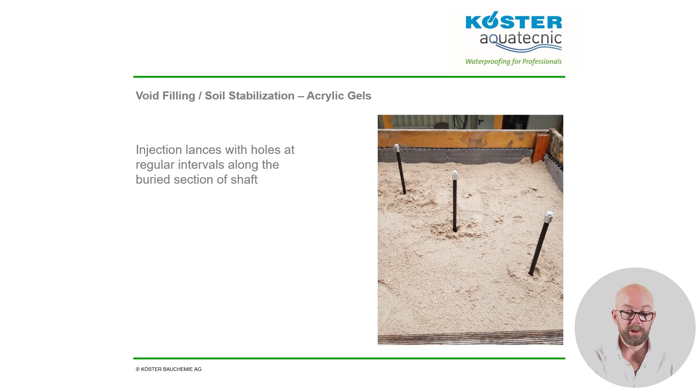This can be filled with sand or any other combination of soils. The injection lances are inserted and the gel injected. After about 20 minutes, the side of the test bed is removed together with any loose sand.

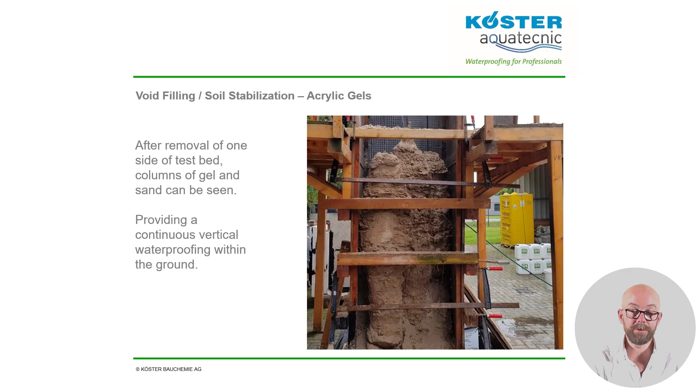In this case, you can see three distinct columns that have been formed by the gel and sand. These columns slightly overlap with each other, so this would be a perfect outcome if we are wanting to create a continuous vertical waterproofing barrier within the ground.

The last injection system we are going to look at is microgrout. This is a cementitious material that is very finely ground and has a very good flow rate. Such materials have a high final compressive strength and are shrinkage compensated.

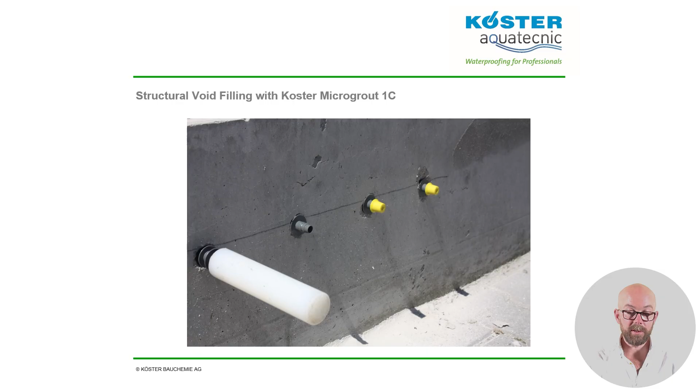The material is injected using a grout pump or a peristaltic pump. In some cases where the void is open at the top, it can also be poured.

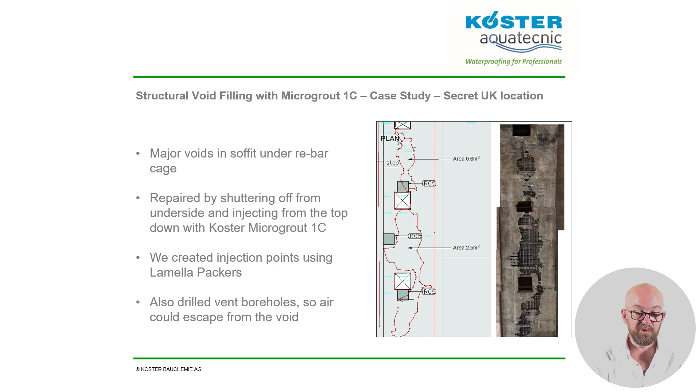From the top, 18mm boreholes were drilled, lamella packers inserted. A number of vent holes were also required, so when the microgrout was injected, the air within the void could easily escape. When the injection was finished, the microgrout could be seen flowing out of the vent holes, proving that the whole void was filled.

After 24 hours, shutters were removed, the packers snapped off, and the boreholes filled flush using a fast-setting mortar. The image shows the repair immediately after the shutter was removed. The microgrout looks darker than the surrounding concrete, but as it cures, it becomes lighter.

This type of large structural repair can really only be done using a microgrout. With a troweled repair mortar, it would be impossible to fill all the gaps around the rebar. An epoxy resin used in this volume would generate too much heat, causing it to then shrink back as it cooled.

So, did anyone think of a good answer to the question I posed at the beginning? Well, cracks can be caused by many different factors. Generally, I like to think of a crack as an unplanned movement joint. The structure at that point is wanting to pull in many different directions, but there is no movement joint, so it makes its own.

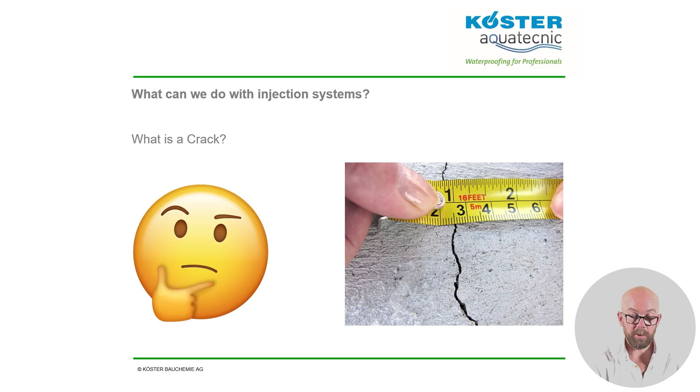That's why generally we use elastic materials for crack sealing, except in cases where a structural repair is required. If we are making a structural repair, then we should ask the question: has the building finished moving? If the building is still wanting to move, then as well as a crack repair, we may also consider some alterations to the structure with the help of a structural engineer.

That brings us to the end of our CPD, injectable systems for cracks, joints, voids and curtain waterproofing. There are many different things we can do with injection systems: leak stopping, structural crack repairs, soil stabilisation, expansion joint refurbishment and void filling. With all the different products and techniques that can be used, it's really just a case of matching the right product with the right technique for the right project.

At Köster, we have a virtual toolbox of injectable materials. By that I mean we look at each project, we have many different systems, application techniques and product combinations to choose from. If the only tool in your toolbox is a hammer, then every problem just looks like a nail. If you have many different tools available, then you can solve the problem in the most suitable way and achieve a permanent solution.